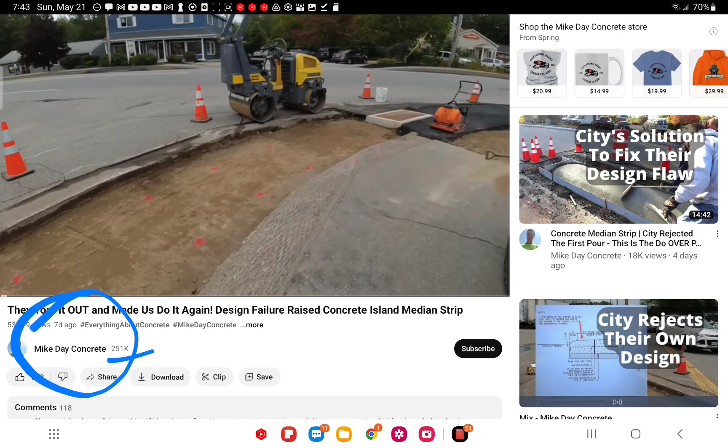Alright people, let's go over this Mike Day video again - once again dropping the ball. 251,000 subscribers, doing some city work here apparently for the city.

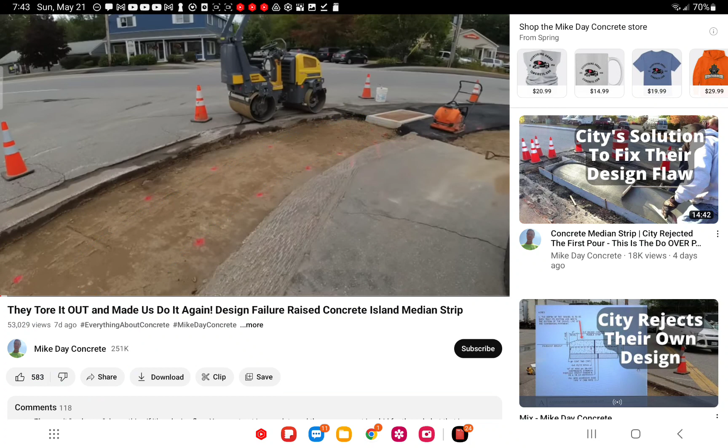Let's cut to the chase. I'll watch the video - these are the marks laid out by the surveyor that he's supposed to follow the tracks for. He thinks it's kind of close, is what he states, but he looks like he gets it there. Let's fast forward, because I've got to do a narration for fair use.

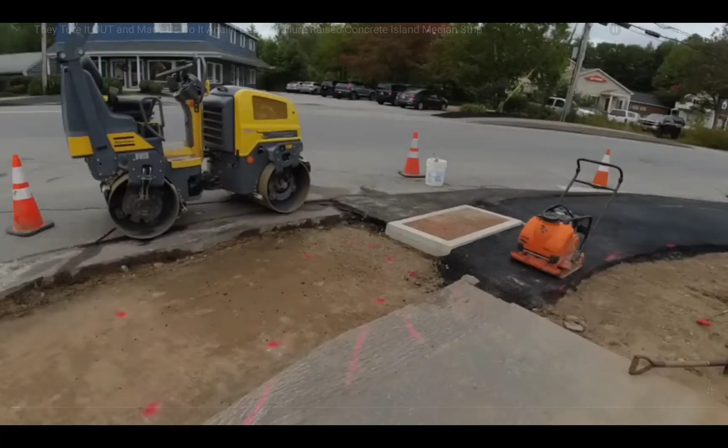I'm going to form up what they call a rumble strip, so it's a continuation of this sidewalk here, kind of into the parking lot. He's just stating it's 3 foot wide, by about 55 feet long. It's got kind of a curved area to it.

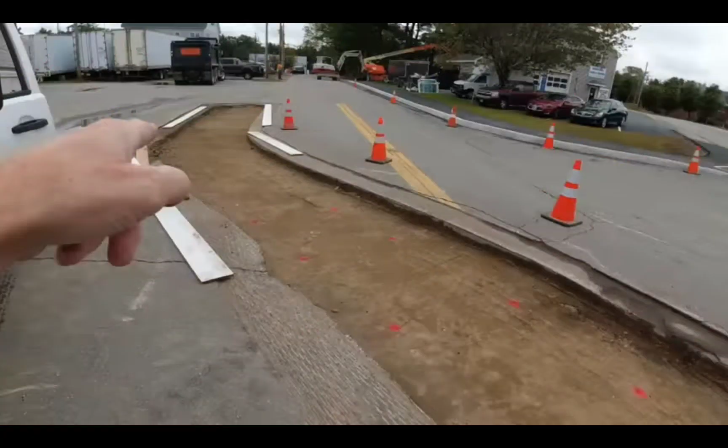So let's look at the roadway, looking at the curb across the street here - it goes that way. Looking at this line, traffic still comes this way. Looks like they changed the pattern a bit.

Wait till you see this thing. It's a little bit higher than the pavement when they're all done - about 1 inch higher. So when the cars drive up over it, it's got like a rumble strip on top for 2 feet, and then they drive back down over it, I guess.

So he understands how a rumble strip works - he's old enough to know that. You drive on top of it, then you drive back off of it, he says. Well, that's not quite it, but let's see what the hell happened there.

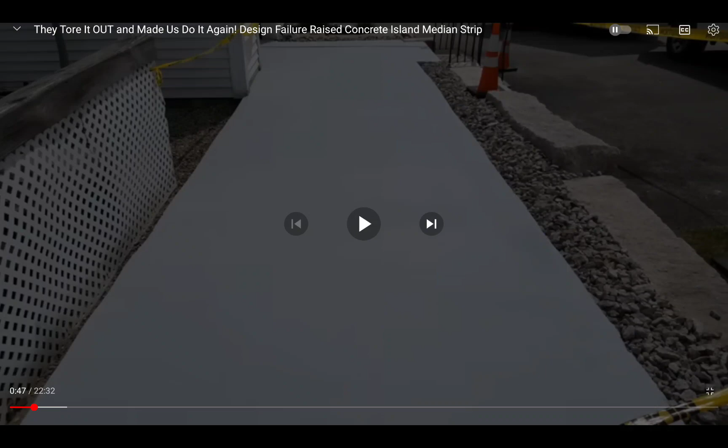Let's let that play. I didn't know that - the cars are aware they're driving into a parking lot, I guess. So I've got to get the forms up, and then I've got to set my forms pretty much to the width of those dots, about 3 feet wide.

Get a stake - okay, so there's the lines. That's what I'm here to do today. And then tomorrow morning, the plan is to get this poured. So let me just go ahead and fast forward.

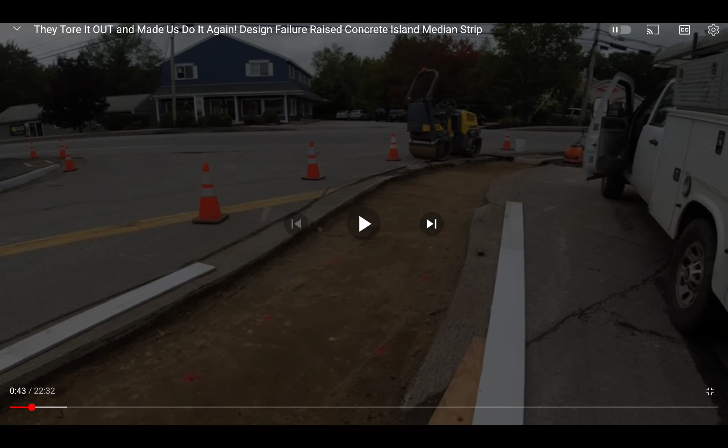So here's the design that, per the engineer, he states, gives it to him - raised mountable concrete island. So it is called a concrete island, alright? Not just a rumble strip, but it is pavement buildup, and it's called a rumble strip.

You see it there - it's important to note the fine details that they used of this. He's going to use some massive rumble strip thing. I mean, it looks like a shark bite, it looks crazy. This is a finer detail, and this is for detail purposes - the how the rumble strip looks.

He is going to pour the entire concrete 3 foot section, and then he's going to manually just eyeball that and wedge it out with a margin trowel. The depth of the concrete, talks about the gravel depth - total is 10 inches in depth, and the 10 inches is roughly right about the middle.

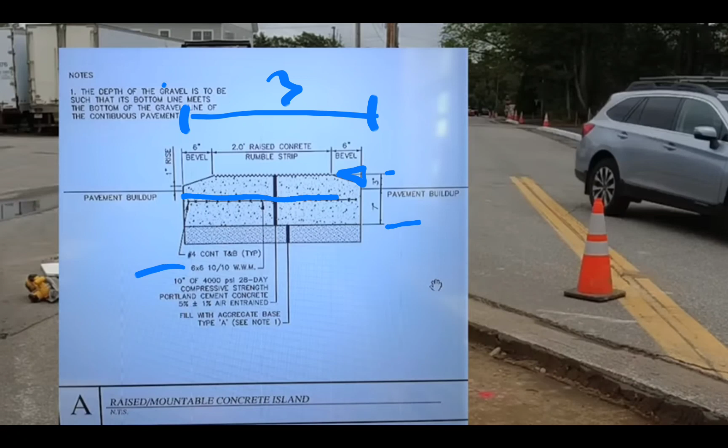It says right here, 6x6 wire welded fabric, mesh, and number 4 continuous rebar top and bottom.

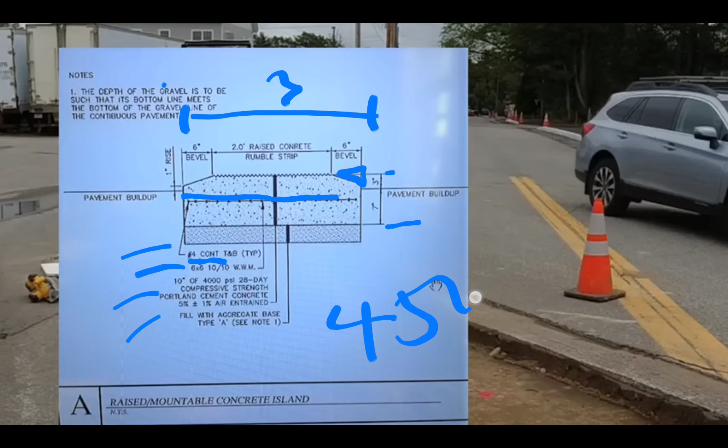It tells you the concrete is 4,000 psi, and at 5% - he says he's going to use 4,500 psi. Well, they specified 4,000. Now you're saying, well he's doing it, you can do it for free. There's a state mix - you'd think this would be a state mix, but it's a city job. They gave him specification, and he's using out of specs - he's going to go to 4,500.

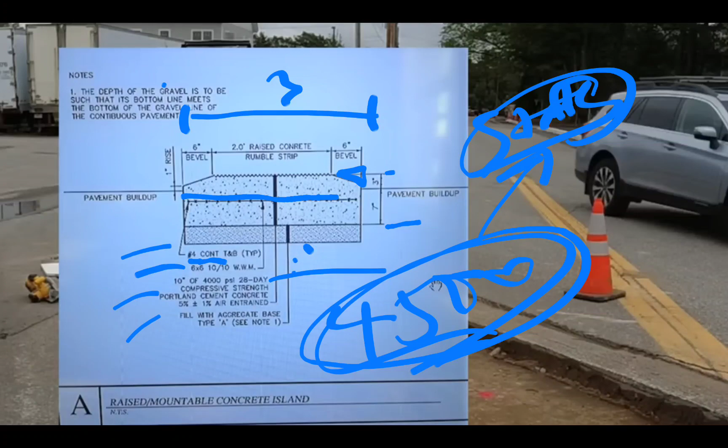Alright, let's listen to what goes on here - we'll come back to this drawing. From up above, it's kind of a long, narrow, skinny thing that's going to be set in the road. So again, remember it's pre-engineered, it's all been figured out by an architect.

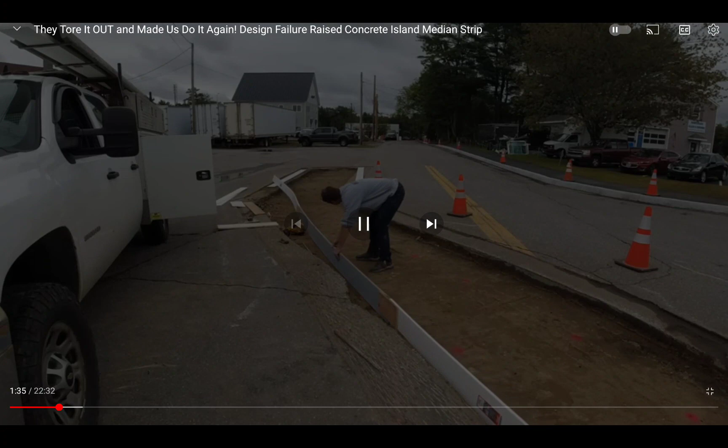And we live in Maine, and we get snow from December to March into April. So he's going to make fun of - I want you to hear him make fun of this guy on the asphalt, on the tamper, sometimes up here. There's going to be plow trucks going over this thing, so keep that in mind too.

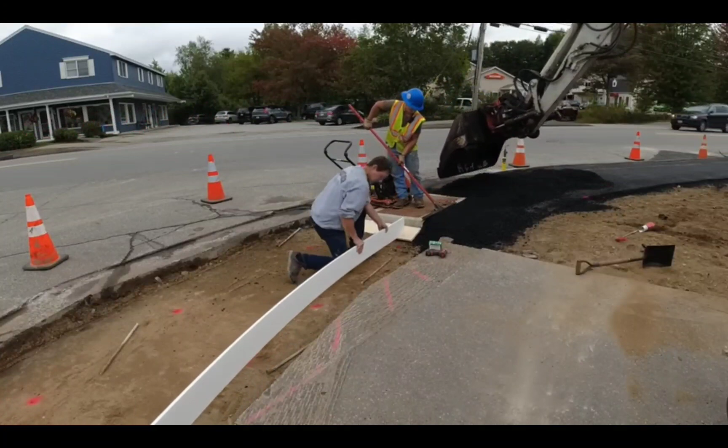As we get to the end of the video, I've got a little bit of a surprise for you. Let the joke go, but right now I'm here today, I'm just by myself - Darren and Luke are on another job. Let me fast forward, let me mute that and do narration.

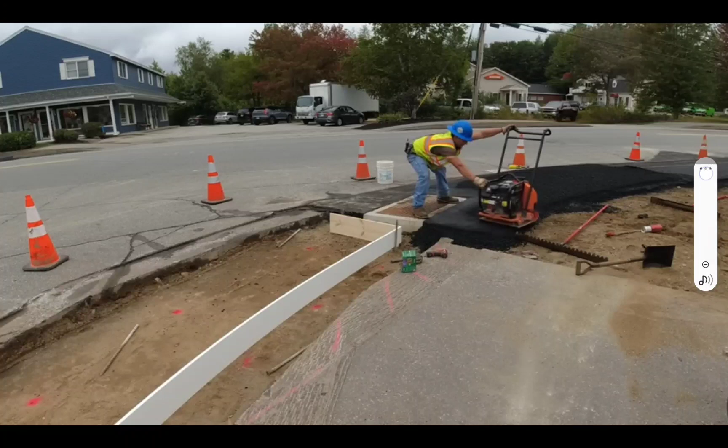So these guys are doing the asphalt, and the one guy is going to come back and tamp. Remember, this is a reversible tamper, and it's tamping over this asphalt, which is pretty fast. And the prep work here, as there is going to be in the pouring, trying to get this thing to look like that drawing on the print.

I thought you guys might want to see this guy compacting the asphalt, running it over the soft asphalt, then back up over the hard stuff. I'm not sure which one he was trying to compact there, but anyway, he got it done either way. So he's making fun of the guy a bit.

So here are the lines that he's got to marry, right? Those lines there. Now let's go ahead and pause and let me fast forward.

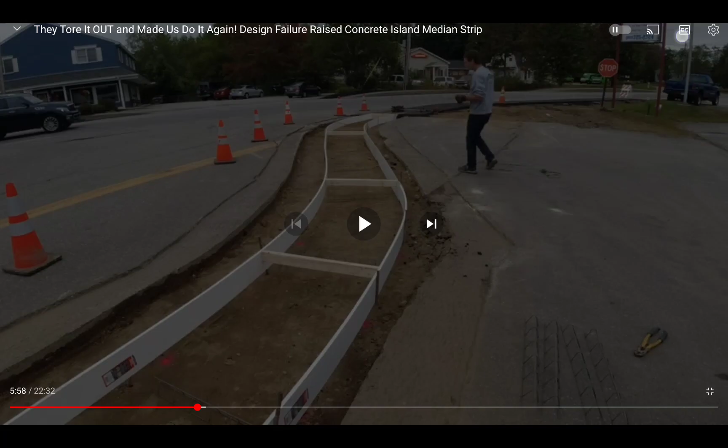Okay, so now he gets some chairs, places them here in multiple places. He has the wire welded mesh. All right, let's hear him talk.

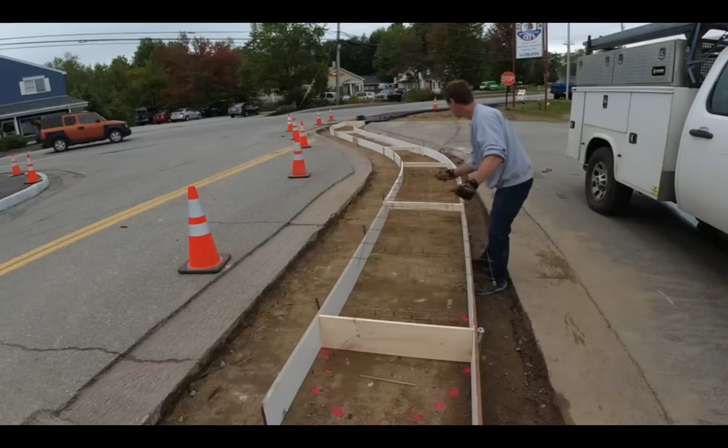Length, so I'm cutting them in half. Cutting the wire in half too. The wire comes 5 foot wide by 10 foot long, so I'm cutting that 2.5 feet wide and setting it down in there carefully, trying to make sure it doesn't touch the edges. He says cutting it 2.5 feet wide.

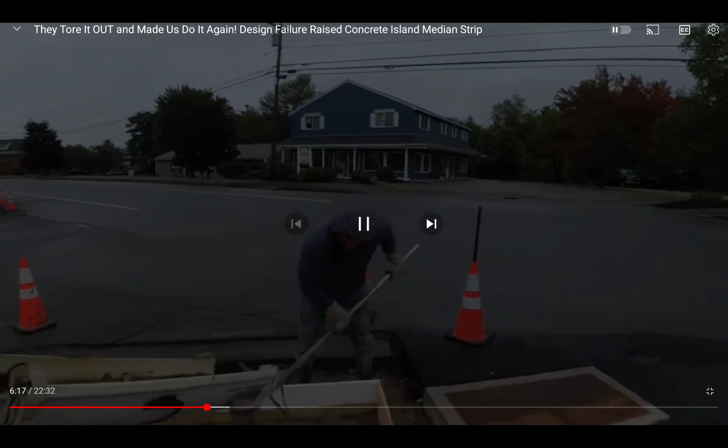Okay, all right, here we go, just getting started here. So they're already pouring the concrete. Let's see how this goes. We got 4,500 psi concrete.

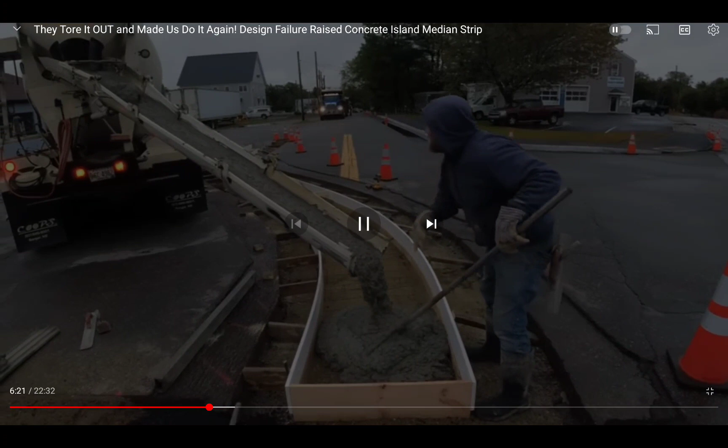Okay, let's pause right there. Yeah, a little clearer. Okay, right about there, let's pause and look. There's the wire mesh. All right, the wire mesh is in there.

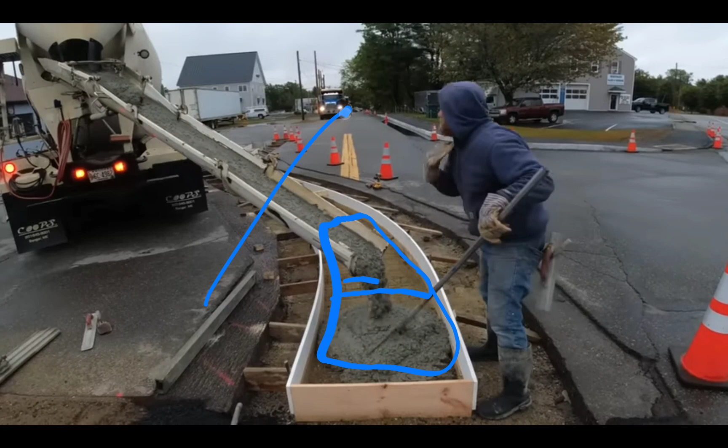It said 2 directions, number 4 rebar, top and bottom, T and B. Number 4 rebar, 1/2 inch rebar, and the wire mesh. But it's not in there - there's no rebar in there.

Let's go back to the drawing. Right here. So I got a set of plans I'm going by today. The city had this - he's got a set of engineered plans, and then they had an architect draw it up just the way they wanted it. So they must have put a lot of thought into it.

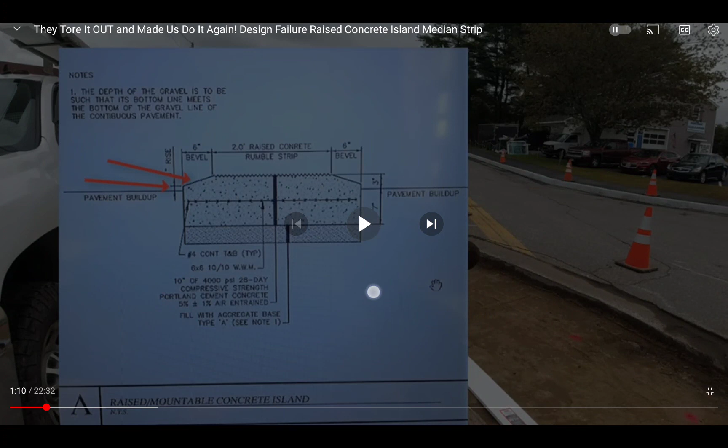So right there it says number 4 continuous rebar, right? Number 4, top and bottom, and the 6x6 wire mesh. Now they said they had an architect draw it up.

Now it gets worse than this, but right now you see that there. Remember the rumble strips, right? 2-foot raised concrete. Look at the detail, the architectural detail, such as this bevel - this bevel right here comes up, and it's like that. And underneath, if you look over here, the bevel's around the top, or right near the top of the bevel.

Let's get rid of this. So right here, the bevel is right near the top of the saw cut, right at the top of it, right there. The bevel right there. The bevel over here is near the bottom - it sort of still goes above it.

A little conflict in the engineer - the architect rather - in his software program. So you would ask for clarity on that. Look, you got 2 different bevels here. One looks like it's the top of the peak, and one looks like it's the bottom of the peak. Which one matters, but I can get there from here.

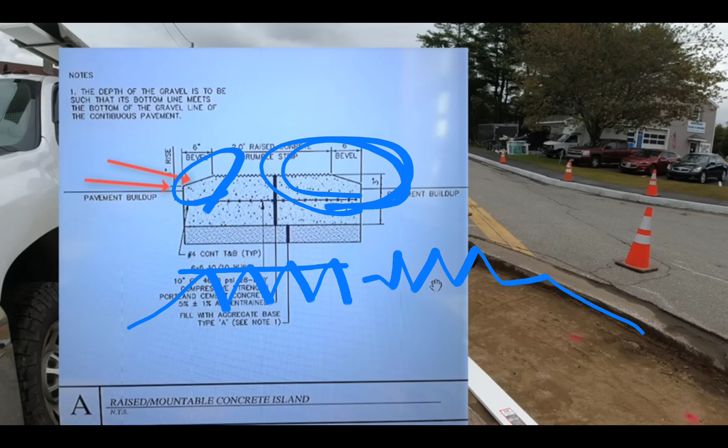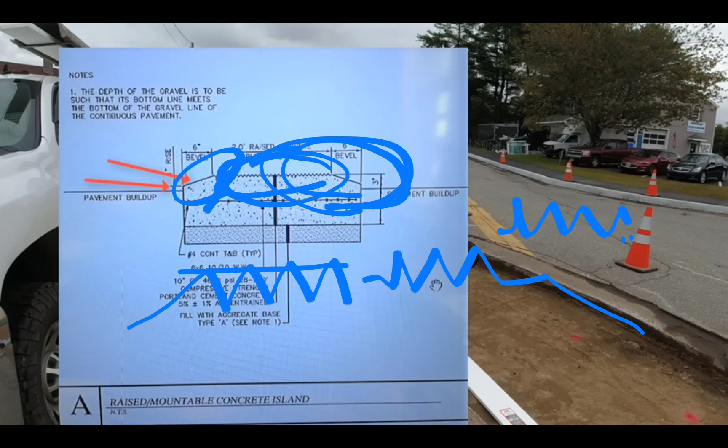But I need to know also, what is the spacing of this? If I count these up and down ribs in 2 feet, there's the 2 feet right there. I got somewhere about 10, 20, about 40. So it's somewhere about the detail, like a handicap ramp type of deal.

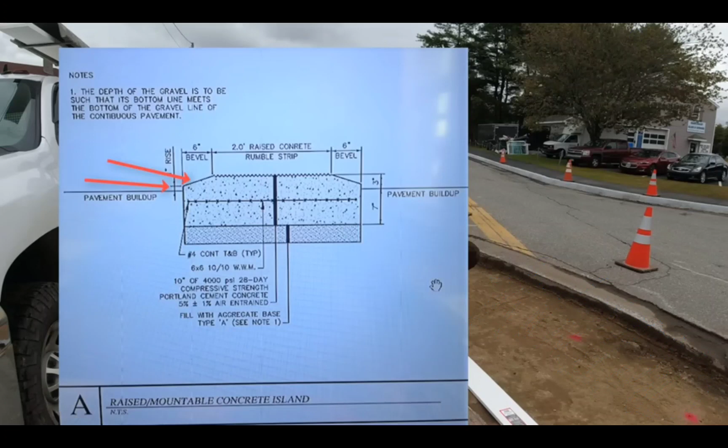And what is the spacing on the roadway? On the roadway, what's the spacing of these? So here's the roadway. How much space between it before you put the other one in? They're not just continuous, right? They're not just continuous. Oh, but wait till you see - wait till you see into this. And here's what I'm doing right here. So the first arrow is a 1-inch bump.

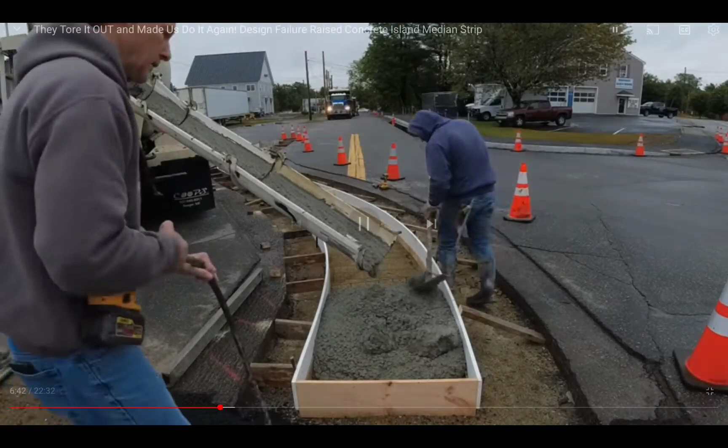So here he is with the concrete. You can go to his own video if you want. So you see there's big chunks of concrete.

Apparently you just don't get rid of it, you slide it down and keep it in the mix. Oh well, you just break it up. Yeah, that's it, that's what you do. Throwing it out on the ground would have been more ideal, or calling it trash, especially since you're doing a video and getting paid by a municipality.

There's a hoe. Okay, so now let's fast forward. All right, get it to hold its shape. The trick will be later on down the road trying to shape it up. Okay, let's fast forward.

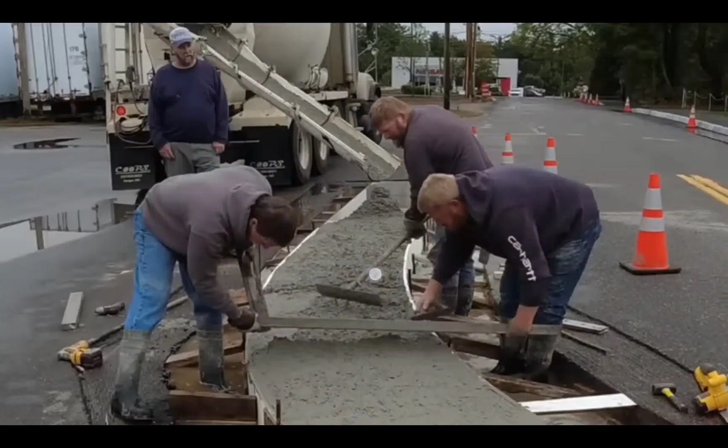So you see there, it looks like it rained on the outside. If you look at the water out here, you're going to see a massive amount of water. So what's up with that? He just poured it on wet ground. There's no chance that was dry under there, is there? No chance, so it's just what they thought the ground was going to be. Let me know if you guys can pick out the flaw in the design, because there's a major flaw.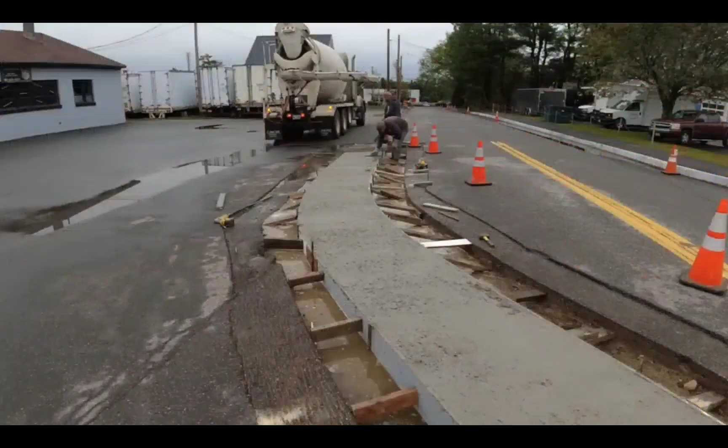He said there's a major flaw in the design. All right, you are the major flaw in the design, not asking for clarity and installing these incorrectly. You said it was an engineer that said how he wanted it, and the architect drew it up. So wait till you see this. I could pick up on it as soon as I was told about it. I warned them about it, but they didn't want to listen. He said he warned them about it. Wait till you see, right down to the end.

Look at this water here. Just got to do that little curve. Look at the water on the ground there, guys. Curved end on this, it's like a swimming pool. Look at that, it's a friggin' swimming pool down there. Look at the water pulsing out of the back there as it's being pushed out. It's just ridiculous. Now let's go to the tool that he uses.

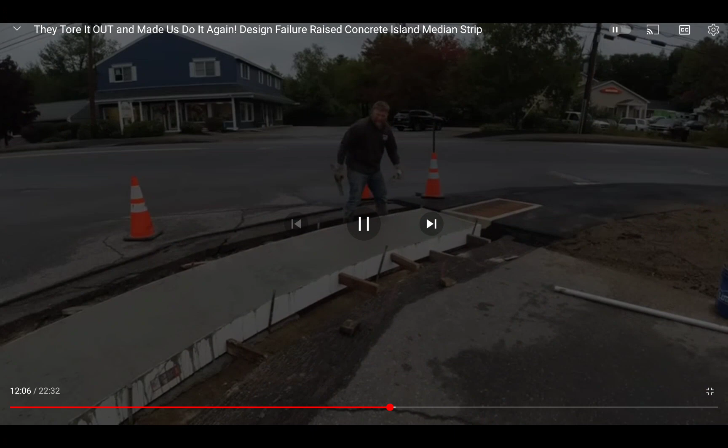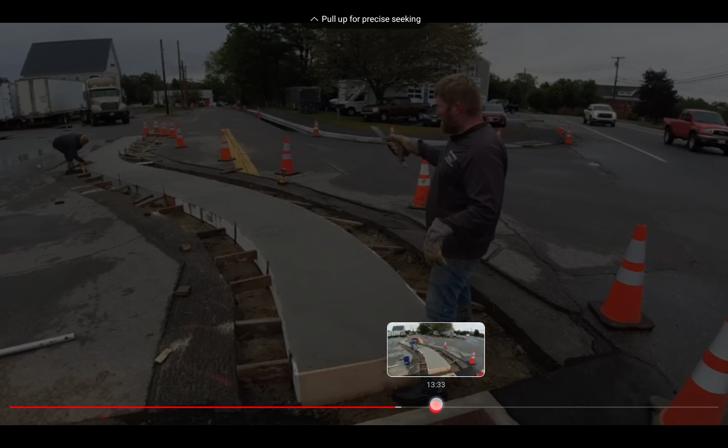All right, so you should get a kick out of this tool. So he says he broke the tool, and now, whoops, went too far. All right, to your left. So I'll give him this - he said he broke the tool by accident, but the tool was too big otherwise.

So what do you mean by accident? I'm kind of curious about that one. I think he said by accident - it broke right where I needed it to break. Okay, well, there is a tool like this, they sell this grooving tool.

All right, and here's the thing though. Here we go, we got to watch it. So he's just going to sort of eyeball it, and you just use a clamp to put it on there. Eyeball it, and there we go.

And look at the guys to the left, they're watching. And one of them's going to get a bright idea that, you know what, let me use a tape measure to do this, because your eyeballing is not cutting it. So here he is with the tape measure. Smart guy, he's trying to match that taper right into that groove, right?

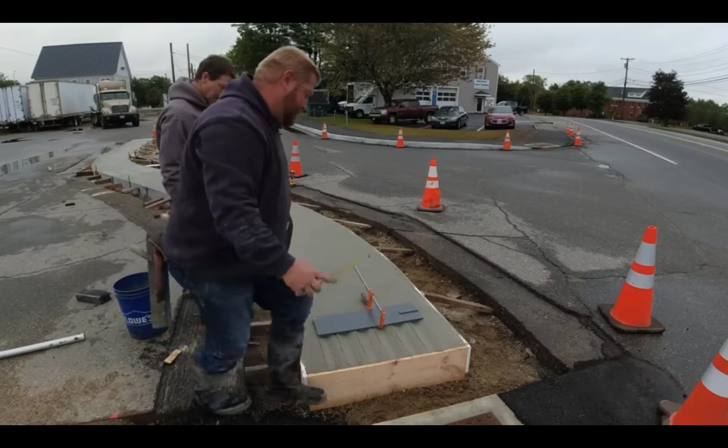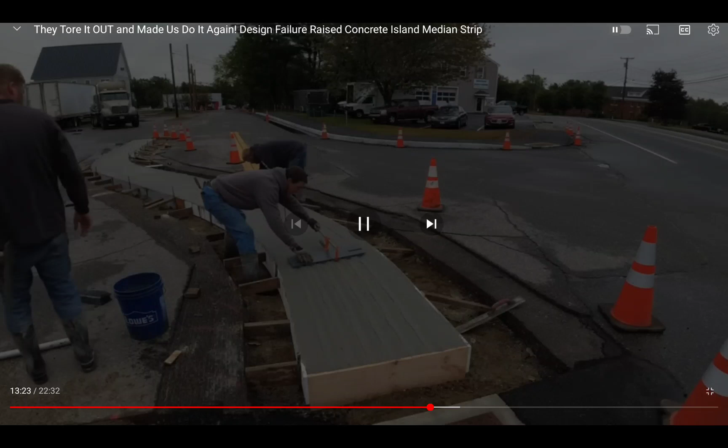So he's too far in with the left. This is where it's supposed to be. So no matter what, it's going to be wrong. The taper, using that tool, the taper's wrong. It's right for the run to the right, but we saw the one to the left. Let's back it up again - the one to the left.

Okay, back up 10. All right, all right, so watch where he puts the tape. Remember, that's the top, that's the end of the top of the bevel, the inside of the bevel. Watch where he puts it. Right, let's see.

It's right there—his tape measure is beyond. The line's too thick, but it's beyond the cut he's making. So this depth here is not the required depth. It's supposed to be tapered down approximately 2 inches, and then this is 6, and this is 2.

So he's using this tool—you have to cut it, literally just cut it and custom fit it for the job. But no, in for a penny, in for a pound, as I say. So there it is, too far in. And this tool is not going to be recut; it's going to be the same tool with the same piece on it.

Let's see how it goes on the other side now. Right into that groove, right? How is it on this side? So now the measure's here, and it's a little bit in also. He says that'll work, but that's not what the spec said. The spec said 6 inches.

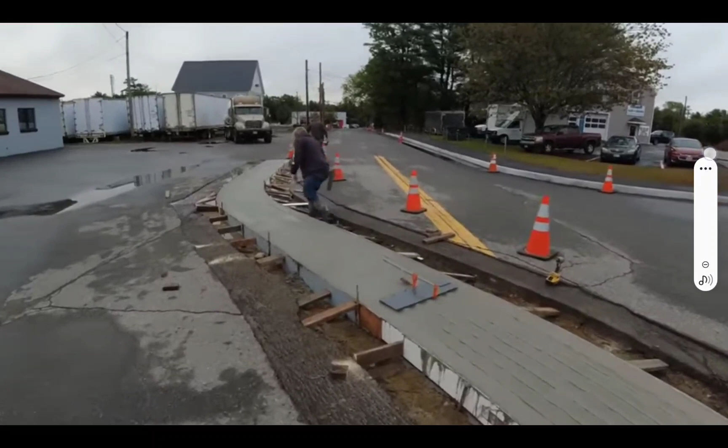We'll just have to keep touching it up as it sets up, make it look a little better. He says this is the rumble strip like he wants. We can't wait—if we wait any longer, it's going to be too firm to get that in.

So his rumble strip is continuous—a continuous shape form. Look at it, it's a continuous shape, and it follows the traffic. So traffic coming this direction, we'll just see this as a curb. It's in the same direction. Rumble strips go the opposite direction.

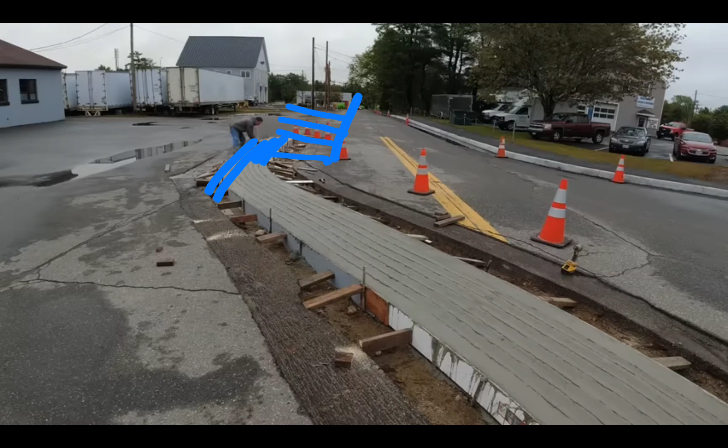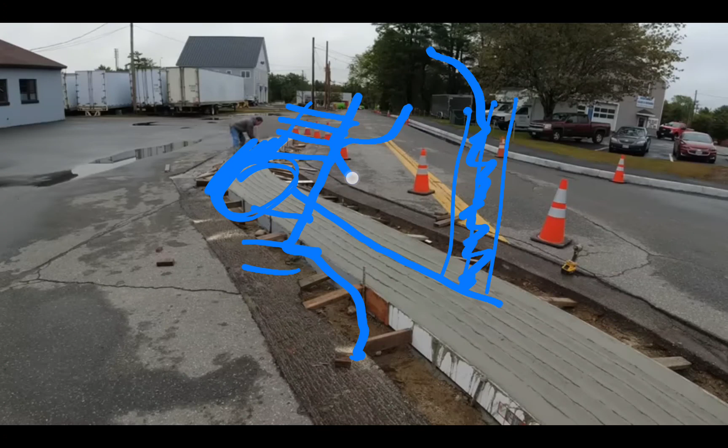So when you drift off of them and come back on—rumble strips do not go in the line of your cars. You would drift off and your tire would lose steering control maybe, but they don't go in line with the traffic. The only part that's probably not in line is this section here. As you come around a turn, you're back in line with this.

So look at his rumble strips—this guy, he drives me crazy. He keeps showing up on my feed. And when I saw this, and his comment about dragging you into it, his thumbnail, I was like, you know what, I gotta see it. I gotta see how he's gonna mess this up. And sure enough—

So they got two of these pieces. He just walked by one, and there's the other one. And they're gonna edge it—they're gonna do it again. Now I'm gonna fast forward.

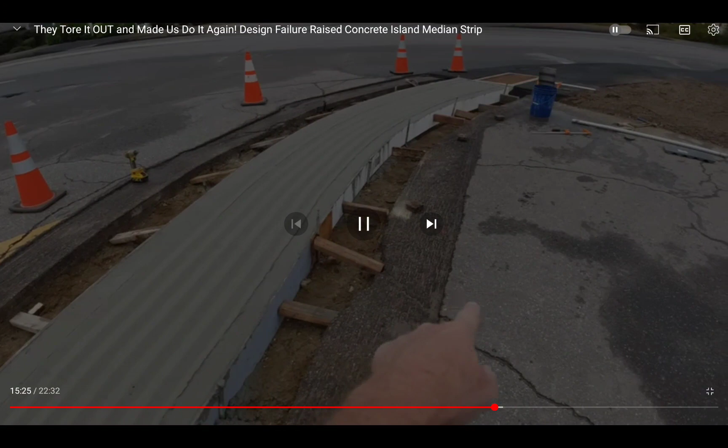Let's see. When we taper it down 2 inches, that's going to leave us an inch above the asphalt. So they want about a 1 inch bump. They'll asphalt up to it, and they'll end up with a 1 inch little bump. Taper up those 2 inches, and then they'll hit the rumble strip, taper it down.

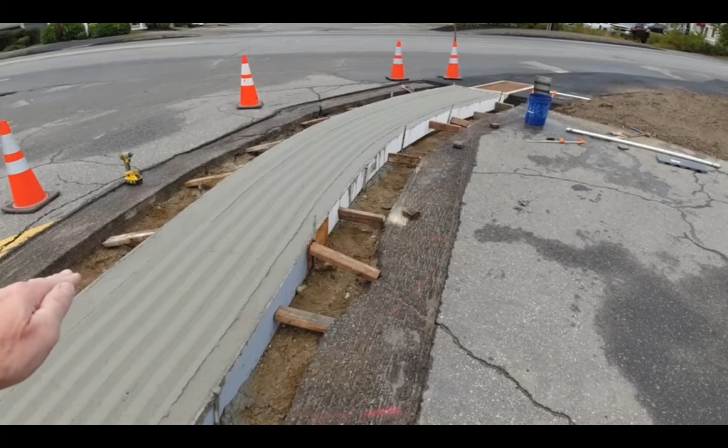Hit the rumble strip—does that look like a rumble strip? This looks like a curb, just a deep grooved curb. And if you look at it, this doesn't look like the design. I mean, we got 1, 2, 3, 4, 5 peaks.

5 peaks. When we saw that, it had close to 40. It had close to 40, and he got it down to 5.

All right, he's going to show the drawing again, so we'll look at it again—2 inches, but I want you to see. They got the 1 inch bump, and then they're going to asphalt up to it. So, not my design, I'll show you what the town is—listen, so your guess is as good as mine, but we're just here to do the work, that's all. Wait a minute.

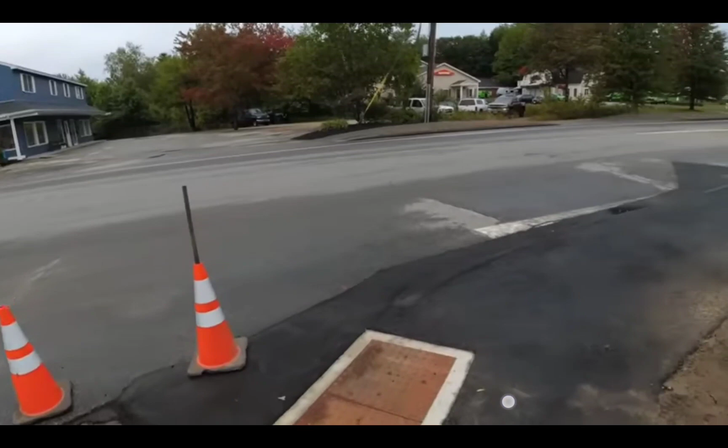But I'm going to run this over it one more time. You can see they're coming down the sidewalk here, down 2 inches—that's going to leave us an inch above the asphalt. So they want about a 1 inch bump. They'll asphalt up to it, and they'll end up with a 1 inch little bump. Ultimately, maybe he did do the tapers on the side—they got the 1 inch bump, maybe, and they did come out. And then they're going to asphalt up to it. So, not my design, I'll show you the plan.

Okay, so here's the plans again. Now, what part of 1, 2, 3, 4, 5 in 2 feet does this show? So 1, 2, 3, 4, I guess 5, however you want to do it.

It's got 5 hits, and he doesn't understand the rumble strip detail. He didn't put the number 4 rebar in as per the plans, and he stated he used 4,500 PSI concrete.

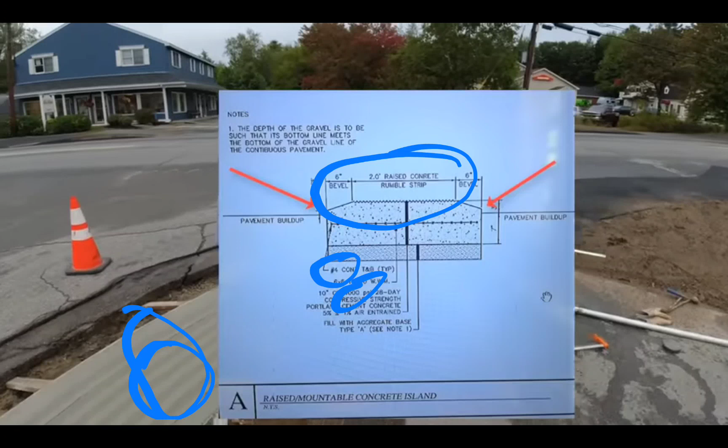But this detail doesn't look like that. This strip doesn't look like that. It followed, it says that it followed the rumble strip spacing - that was a detail that was left out. He said it's Maine. Maybe in Maine the engineers and architects just don't know to simply look at the highway departments' use of the federal guidelines for federal highway rumble strips.

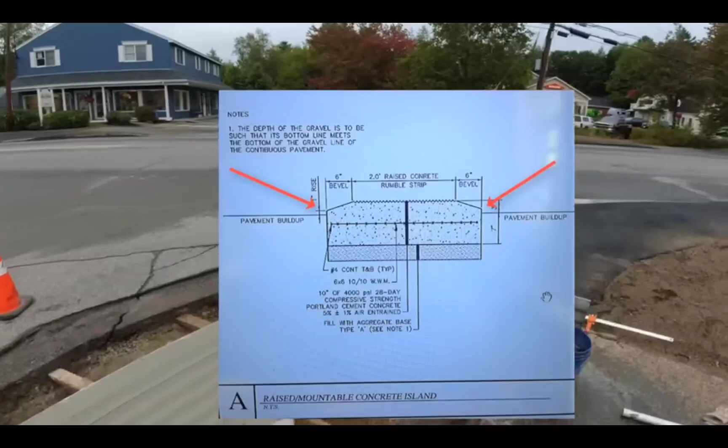And also there's a sidewalk across the street. How do they - I don't see a handicap ramp there. I see a handicap ramp, but I don't see one coming the other direction. But it is amazing, just trying to follow the design, whoever designed it.

I'm going to run this trying to follow the design. Well, that's not following the design, besides the rumble strip. You can see they're coming down the sidewalk here. There's the road, okay. There's a road, turn into - all right, so you turn onto this road.

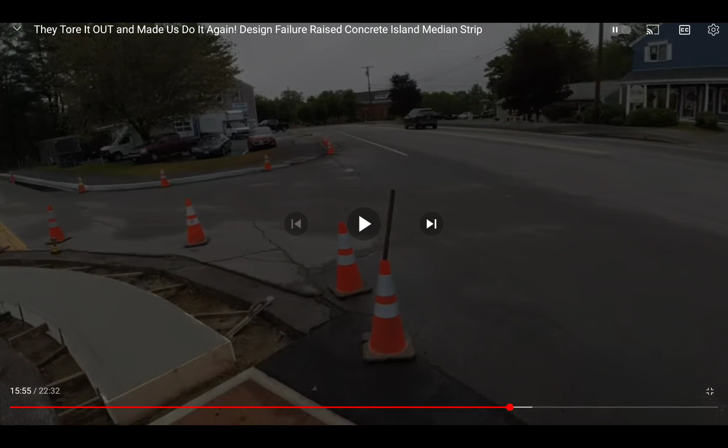So you turn, and at this point turning, your rumble strips go like this. You're following - well, this would be this traffic over here. Was this one way? He said you turn. I think it's two-way because I saw traffic. Well, is it two-way? That's interesting.

We'll hear that, it doesn't matter. No, this is two-way, I think we saw the traffic go by at one point. It doesn't matter. This is the rumble - the rumble strips go this way, whatever the spacing should be, in line with the direction of the tires. Rumble strip spacing, rumble strip spacing.

And this is where you come on, off, and the noise - your rumbling noise. They work. I've hit rumble strips a million times.

And then I don't even know why they need this in here, honestly, but that guy over there is building a brand new Aroma Joe's, and they're making the owner of the Aroma Joe's put this in - the town is making him. Okay, so they're making him put the rumble strips in, but this is a curb.

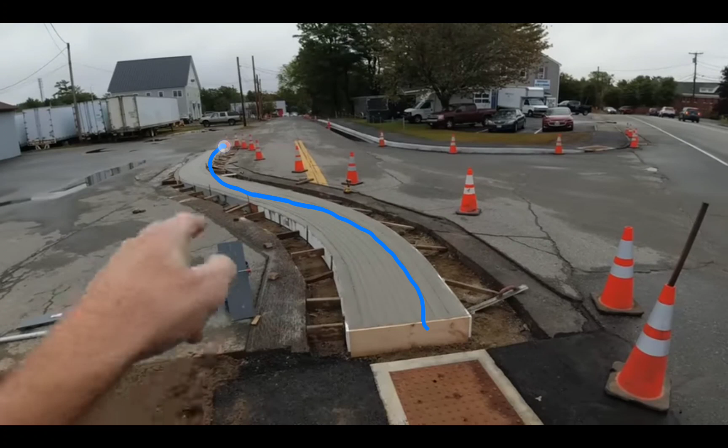Again, this just follows the direction of the curve. They're not rumble strips - this is not a rumble strip. This is a grooved curb, a grooved curb that if somebody walks on it, they'll probably break their foot.

So people walking on this who are trying to get to here, I guess they come this way and go there. But naturally you'd want to go across this if you're coming from over here. It looks commercial. But nevertheless, if you're walking on that side and you come across this thing, say you've got snow on the ground, you come across that, and your foot gets in there - you could twist an ankle maybe. This is unsafe, in my opinion.

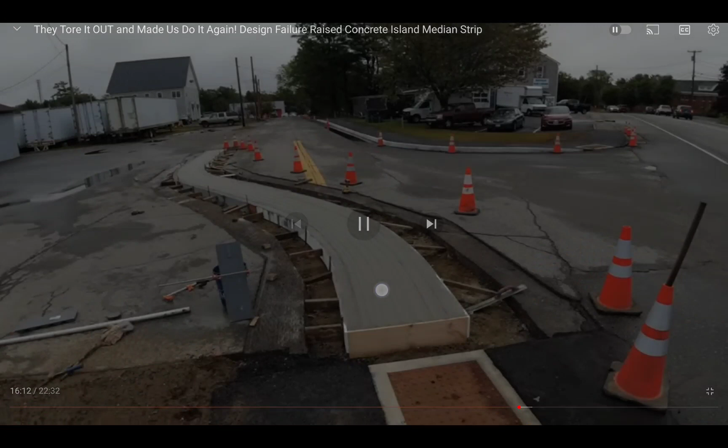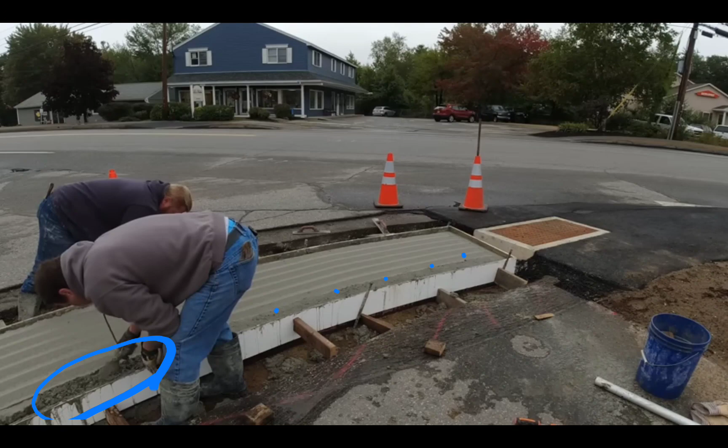And then instead of making a tool or having a tool made for the edging, he's going to just fudge it with the notching. Let's see - he's just using a margin trowel and just tossing it out. See to the left there? He's just using a margin trowel, and they're guesstimating where that line is, and they're just going to smooth it out.

Okay, so there is the... If we look at it, it's almost mirroring the depth of his tool, which would be about a 2-inch drop. So you could actually figure it out - if it's 3 feet, I could figure it out.

Let's see - 1, 2, 3, 4, 5, and I would say that's 6, the peak, because he's just dropping off now. But yes, I'll count it. And 7 divided into 3 feet, so it's 3 feet, 36 inches - we're about 5 inches, there's about 5 inches apart.

5 inches apart, and again they're going with traffic - not well, the traffic's going that way, on that side. See him with the margin trowel there? The steel margin trowel.

Alright, so not to drag it out, he could have made even a wooden tool that would mirror this. But if you look at this, the car's coming this way. You hit that, you just wind up driving your car straight. You could probably get stuck in a damn groove.

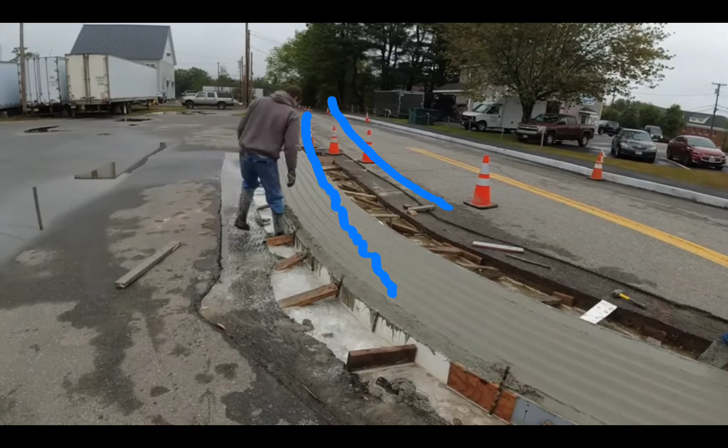If you're on a motorcycle, you're really screwed, right? The idea is to wake somebody up. Imagine being on a motorcycle, this should really get you. These damn things.

This is wild. I've never seen this in my entire life. I've never seen somebody do what I'm looking at now. This guy, I can't believe that he posts videos like a lot of these guys do, and they've been doing it as long as they have, and then they step out of line.

You don't understand that these concrete contractors, most of them are just low level concrete installers. They can do sidewalks, some driveways and some basement pads. Like he does basement pads a lot. But all of a sudden now he crossed into the municipality part, the commercial part, as he states, and I don't like it, and I'm not going to do it anymore.

Well, this is shit. This doesn't meet any highway department's guidelines. This is not a rumble strip. Traffic, rumble strip, rumble strip, rumble strip. Motorcycle, this would be a hazard for sure.

What do you guys think?

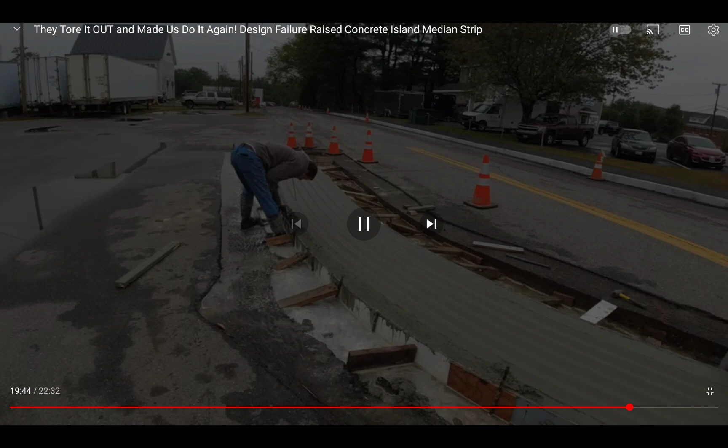And I'm going to fast forward it now. They wanted them to be 6 inches and 2 inches low, so we had to taper it 2 inches. That's the taper part. We'll be back.

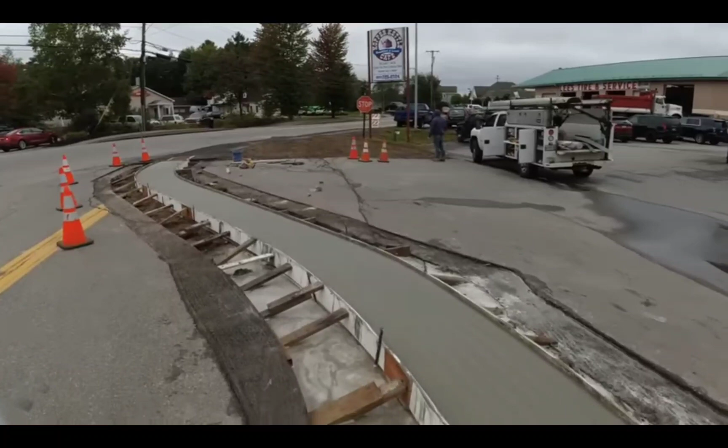We're going to come back tomorrow and strip this, he says. Then he's going to get upset that they were too late. He got there late, and the asphalt guys removed the formworks and installed it. They don't have time to wait for this guy to come.

So we'll get a little bit better idea what it looks like. Take the forms off, and then they maybe got a later time, I can get asphalt back here after they get it paved, just to show you guys what the finished product's going to look like. All in all, I thought that went pretty good.

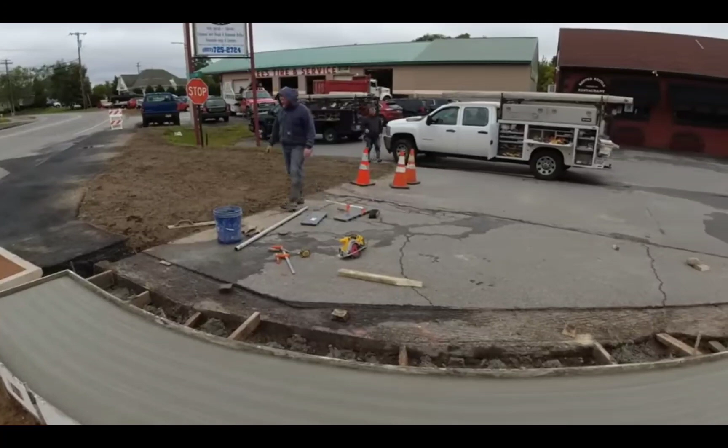All right, so it looks like, and behind us is a commercial tire company, and that's the size of that. Made it pretty easy.

And something else there, we'll see you when we come back and after this is paved, guys. All right, so it's noontime, the day after the pour.

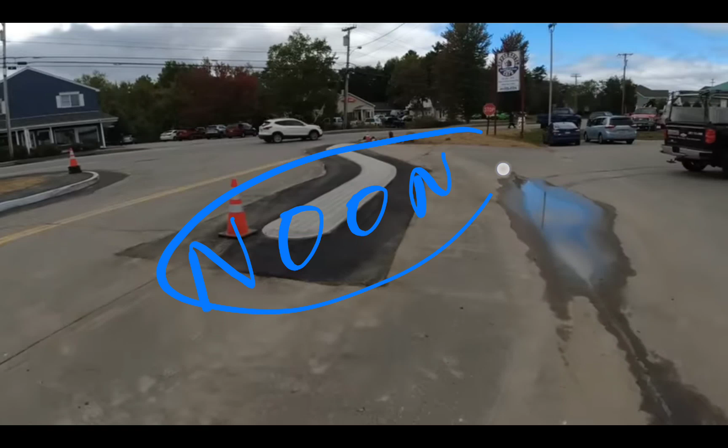He said noontime, I didn't even realize he said that the first time. Noon. So the dude showed up at noon to remove the formworks, and he thinks that these guys should wait for him, the asphalt people. Hey, what the balls on this guy?

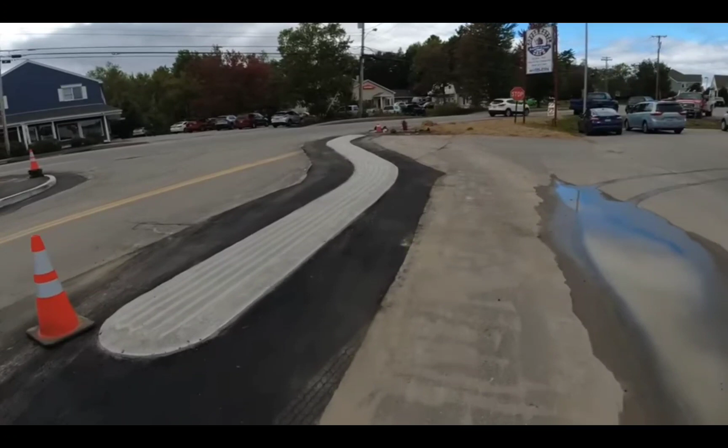Let's listen. Showed up to strip our forms off, and everything was stripped off. It was already repaved and opened back up to traffic. So basically 24 hours they opened this thing back up. They had all our forms piled over here in a big pile.

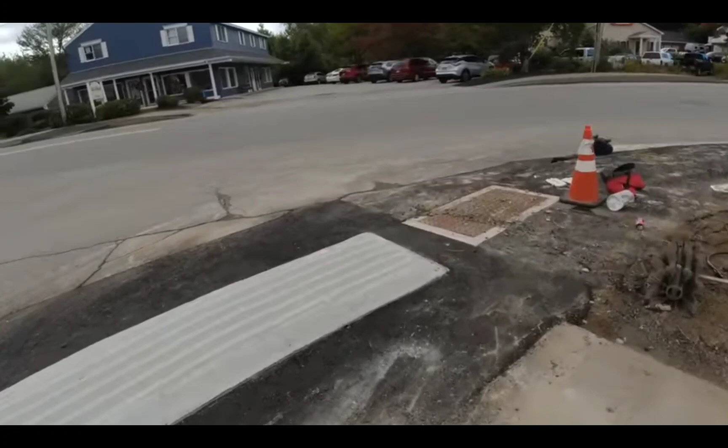It's just a clown show. Now, again, you get your vehicles coming here, right? So it's parallel here, that's not a rumble strip. And then when the cars turn and follow this way, again parallel, it's not a rumble strip. The rumble strip would be as the cars turn, off, on, off, on, off, on, off, on.

All right, oh shit, and you get back on the road. This, you come across the motorcycle, like I said, what the hell's gonna happen to you? I have no idea, in the snow or something like that. What's gonna happen here? But again, he showed up at noon and getting pissy.

That's why I can attack him also, because him and another guy, they attack people and insult people. So he insulted the Tamper guy, and now he's getting on these guys for him showing up at noon.

He didn't install the rebar. Remember the rebar, the number 4.

This rumble strip is not a rumble strip. It's a curb, some type of curb detail.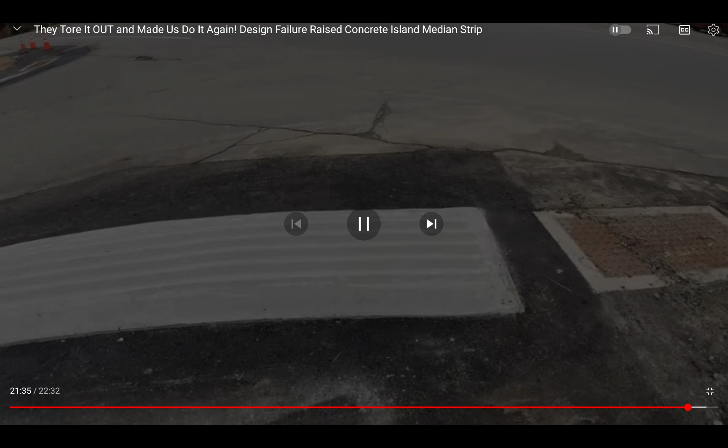They don't really care about your work. That's why I hate commercial work. I'll stay with residential. But all in all, everything came out pretty good, he thinks. You can see he thinks that's pretty good.

Interesting that there's this gap that the architect engineer came up with for this. So the person's going to cross there on an angle, or will they cross like this? The visually impaired person - will they hit his device, his thing, and think, oh shit, I'm at a sidewalk or I'm at a curb? Which one will they think?

Will they think they hit it with the cane? Will they think they hit it, since it's only 1 inch, not 8 inches or 6 inches above plane? What will they think? So I would argue that since this is not a drivable road, it should be like this.

Just so you guys know, curb. Simple as that, curb. It's not designed to be driven over, just curb it. Curb it, period. And there's the vehicle, there we go, coming at us.

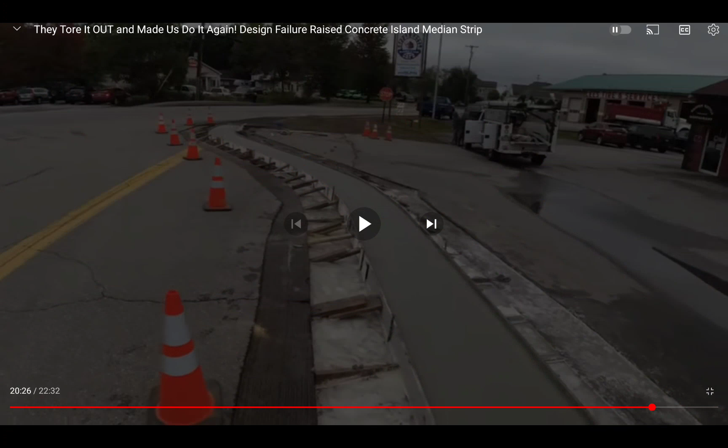It's crazy, his rumble strips are defective. With there's a traffic - oh, there's a stop sign there. So the stop sign, this is real confusing. Look at the stop sign, look where it is. Yeah, that's amazing, a stop sign.

Nevertheless, here's the handicap sidewalk crossway there, and the other one's to your left. And there it is, right there. So you come right off the street, and they just somehow find that and walk across it. No crosswalk identified yet, no striping.

So ending the video, what do you guys think? There's these high points - 1, 2, 3, 4, 5 high points, and then the bevel down, 6, and a bevel down, 7. Do those 7 look anything like this detail in here? Does it look anything like it?

Yes, they sell that tooling he has that he put there. Also the alignment, and also he didn't use rebar. So again, I don't care that I'm kicking him to the curb like that. He's kicked a few people down, saying how great he is and how he's a master and all that. I remember that one a long time ago, and he just keeps doing it.

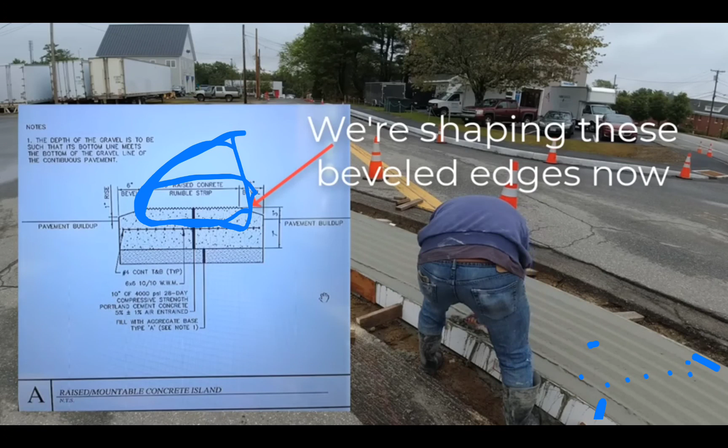like this drawing here, following the detail there. That does not show 7 high points, that shows 40. All right, he's the one that says this is the shape he said he's going to follow. This is not this.

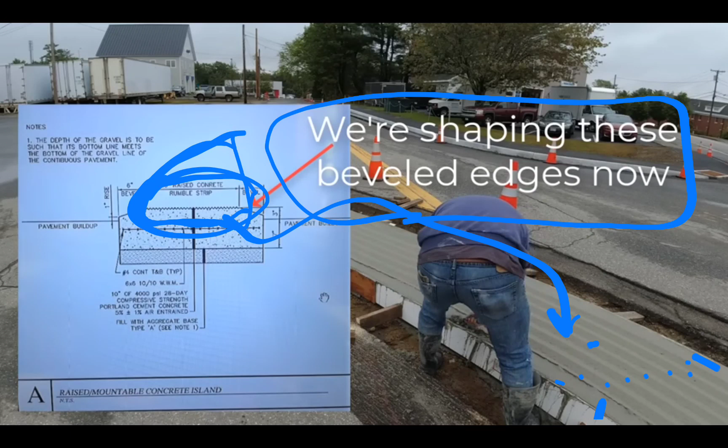All right, did a good job of fudging that with his trowel. All right, they carved it out. Apparently worked out all right. I don't see the 6x6. He didn't mention that he got exempt from adding the steel in there. He didn't mention that at all.

He's put it in that soaking wet water. Apparently, down the far end, apparently we don't have a city inspector out here, and I am done with this video.